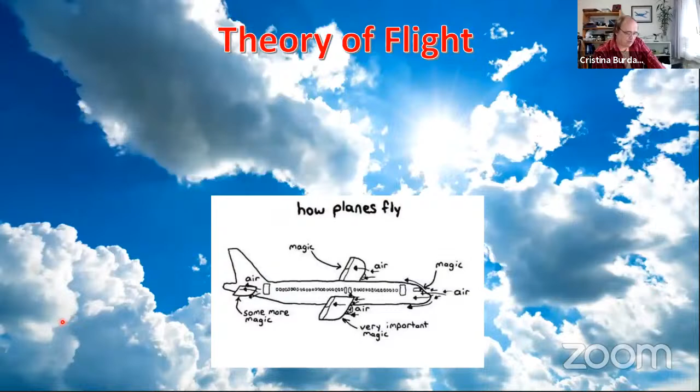Good evening, and thank you, Simon. Tonight I want to talk about some theories of flight, as opposed to the singular theory of flight. I'm going to attempt to demystify some things that have been said and reported in the press - and not only in the press, but in the way I learned about aviation, which I found really annoying, but we'll get to that. Who am I? I work at Pilatus Aircraft Limited. I look after aircraft performance, from design, development, and certification to operational support. But I'm obviously just one of many, many engineers.

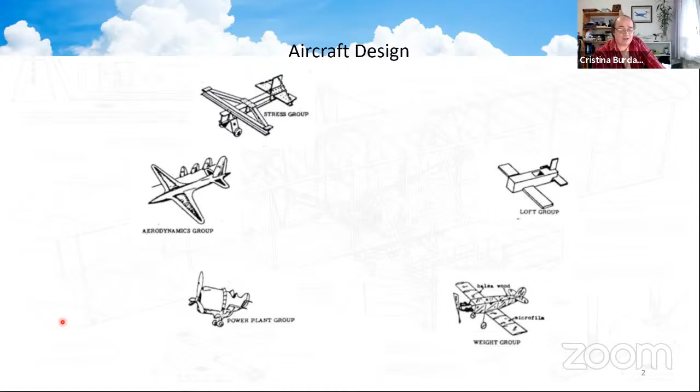In aerodynamics, we love our airplane to be sleek, smooth, rounded, so when it's offered to the air, the air gets out of the way and lets the airplane through. But when we give our drawings to the loft group, they look at what they can draw and produce, and invariably it looks a little different. When the stress group gets involved to make the aircraft nice and strong, they prefer something with iron girders, and you can imagine how this builds up. If they have iron girders, it's all heavy, so we need the weight group in there to make things nice and light again. So we keep fighting with various groups - it's a cooperation, a very difficult birth. And the power plant group, they only think about one thing. So airplane design is a compromise.

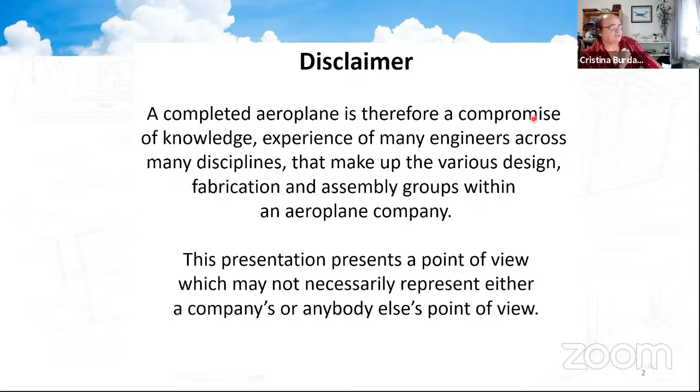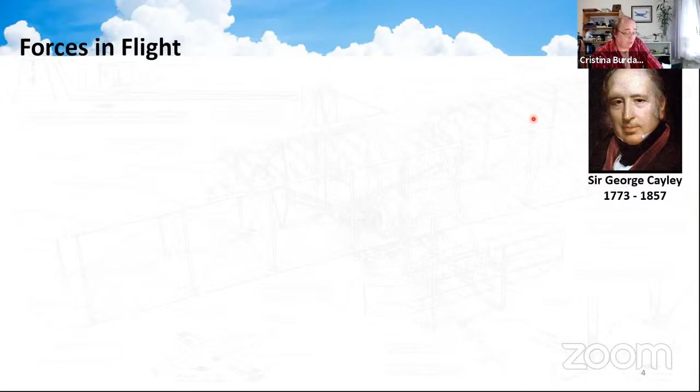So we're going to talk a bit about the science side. Where I'm going to start is on the subject of lift, but I'm going to touch on the historical part by starting on a grassy knoll in Yorkshire, where the landowner, one George Cayley, had been studying aviation for decades. He'd studied many aspects of aviation, loved watching birds and how things flew. And when he was about 80 years old, he came out with a design - this governable parachute.

This is circa 1853, in Scarborough, Yorkshire. He was a bit old to get into this thing himself, and so he volunteered his coachman, one John Appleby.

The reason he did that, at least the story I've heard, is that this glider was going to be pulled by a horse because he wanted to demonstrate the forces of flight. And it actually flew. It flew 900 feet. It crashed.

Mr. Appleby was given basically what looks like a boat with spoke wheels, and it looks like a tiller. This was actually meant to supply control so he could try and make this vehicle pitch up, pitch down, go left or go right. But I can imagine it offered him no control whatsoever.

It crashed after 900 feet, but John Appleby, the coachman, survived. By the time George Cayley managed to get over to speak to him, he had a great big grin on his face that this machine actually flew. The story is that John Appleby asked to be relieved of his services because he was actually hired as a coachman, not to fly.

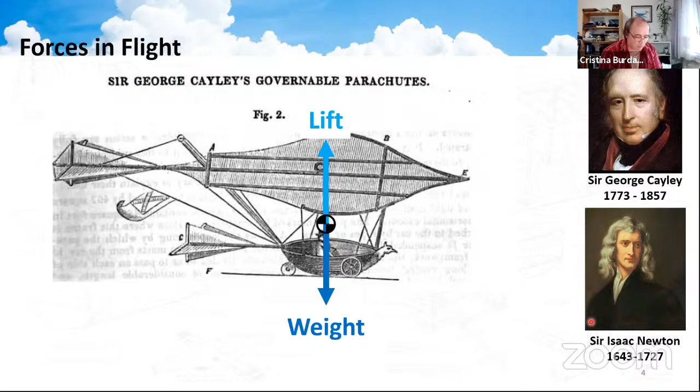He was going to do this by using a galloping horse to drag this thing forward and give it some thrust. But again, applying Newton, there must be a force equal and opposite to that, which he called drag, which would prevent the aircraft from flying faster and faster or slower and slower. It would fly at the same speed.

And these are the forces that we use. This model is basically the core of my work, to tell you the honest truth.

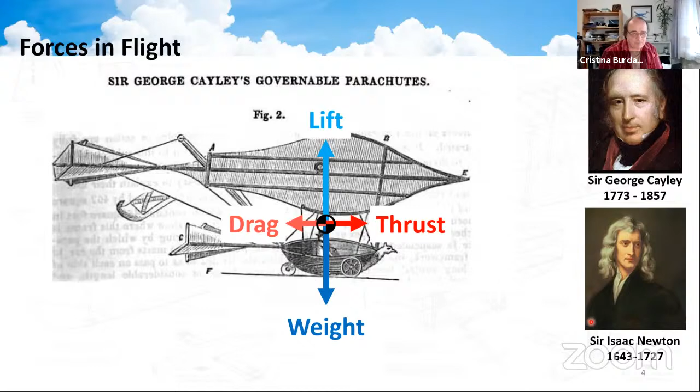Now, you might think this is a flight of fantasy, but now you guys are getting out of lockdown, try going up to the Yorkshire Air Museum, because there is a mock-up of this. It's not the original, because the original finished up in pieces, and they do fetch it out on a nice, fine day.

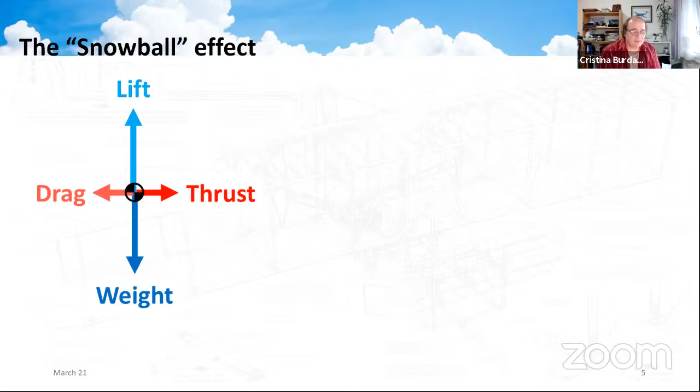So moving on, I want to take these forces and look what happens. If the vehicle took a second person on board, increasing the weight, then the lift must increase as well for the vehicle to stay straight and level.

But the thing you don't see is there is a connection between the lift and the drag. As lift increases, the drag must increase - that's the way it works. But if drag increases, you're going to have to increase the thrust. Now on an airplane, that means either opening the taps, putting in more fuel, or putting in a bigger engine, or both.

But all that means is you would actually increase the weight. And of course, that brings us back to the beginning. So it's a very difficult, a very tender relationship. It's a love-hate thing that goes on. But fortunately, this process is reversible.

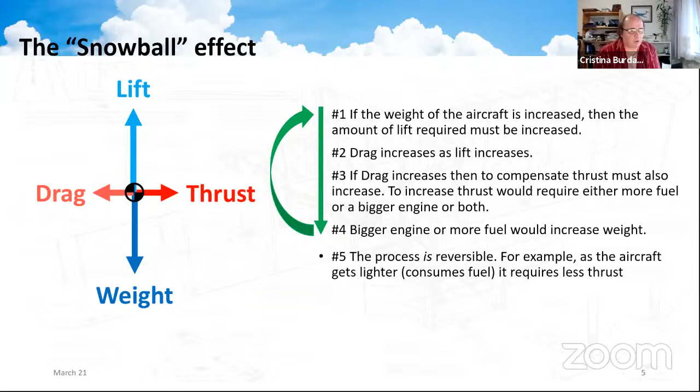As your vehicle gets lighter, as you consume fuel, the aircraft will go faster. In fact, you probably have to finish up pulling back the throttle in some cases. Now, that's all okay. That's what lift is. But where does it come from?

There are a number of theories when I was studying about where lift came from. One theory is the longer path or equal transit time theory. Air is offered to the aerofoil, and the air particles - the blue line goes above, the red line goes below - but they meet together at the end of the aerofoil. They separate at the start, but meet again at the end.

Now, when I was being taught this, I was thinking, well, how are the molecules connected? Is there a rubber band or something? Anyhow, this is a theory we were taught, and because you've got to go a further distance on the upper surface, you'll go with a higher velocity.

There was actually a Swiss guy, Daniel Bernoulli - and in fact the Bernoulli family are very interesting - who realized and worked out that the higher the velocity, the lower the pressure. So on the upper surface, you had a higher velocity, lower pressure. On the lower surface, you had a lower velocity and a higher pressure, and the difference between the pressures provided the lift.

It is incorrect. Now, why am I telling you this? Because I was forced to learn this at university as if it was gospel, and as you can see, this is incorrect theory number 1. There are several incorrect theories, and I learned them all. I have exam papers on them, and I don't know why I had to learn this.

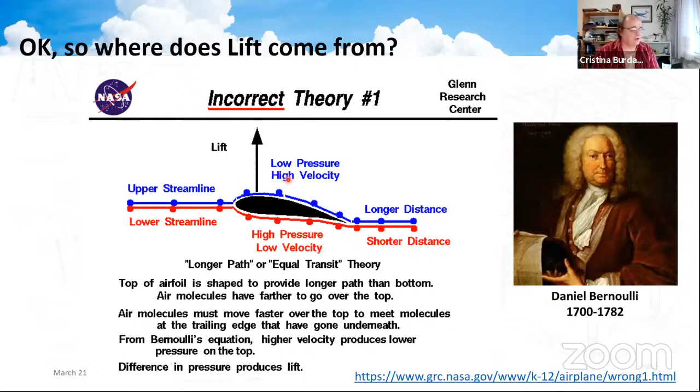Let's show you how this is wrong. I'm going to be handing over to Professor Holger Babinsky at Cambridge Uni, who explains this very well.

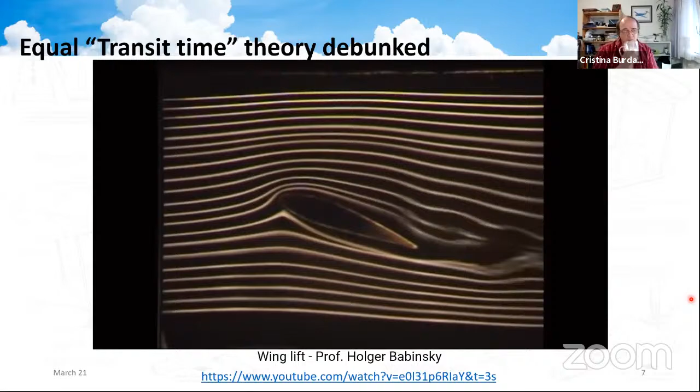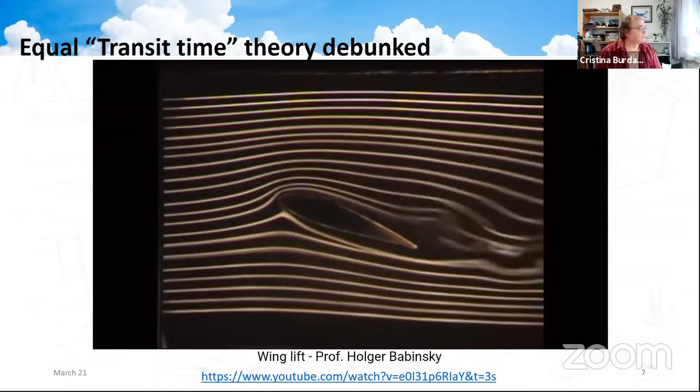Lines. It's often said that lift on a wing is generated because the flow moving over the top surface has a longer distance to travel and therefore needs to go faster. This common explanation is actually wrong. This video shows that the air on the top does move faster, but it doesn't reach the end of the wing at the same time as the air along the bottom. Here we use smoke to visualize the streamlines around an airfoil. We can pulse the smoke by briefly interrupting the supply. This gives us lines that travel through the flow, as we can see here. And if we now slow the video down, you can follow those lines, and that gives you an idea of how fast the flow is in different parts of the airflow. Here you can see it speed up as it approaches the airfoil, and it moves faster over the top compared to the bottom. You can see that it reaches the end on the upper surface much earlier than it does on the lower surface. In fact, by the time it reaches the end on the lower surface, the flow's already gone a long way past on the upper surface. This shows very clearly that the flow doesn't take the same amount of time to reach the end of the wing.

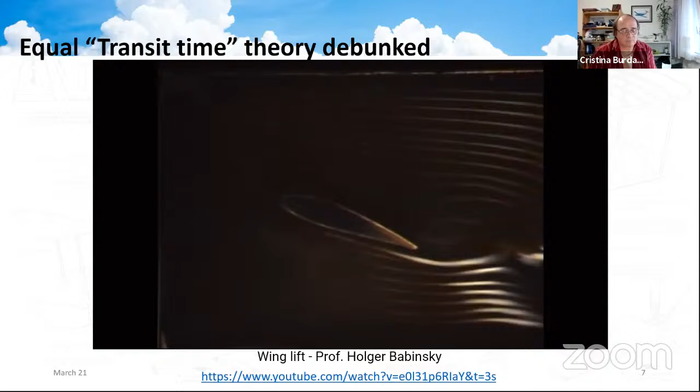Okay, so in fact, it's even faster. That disproved the theory that I was showing you before. As I said before, these were theories I had to learn, instead of learning how lift is really generated. I'm going to attempt to explain to you guys tonight in about 3 minutes how lift is generated. And if I fail, trust me, Prof. Babinsky has got more videos - it'll take about 20 minutes to explain it, but it is worth listening to.

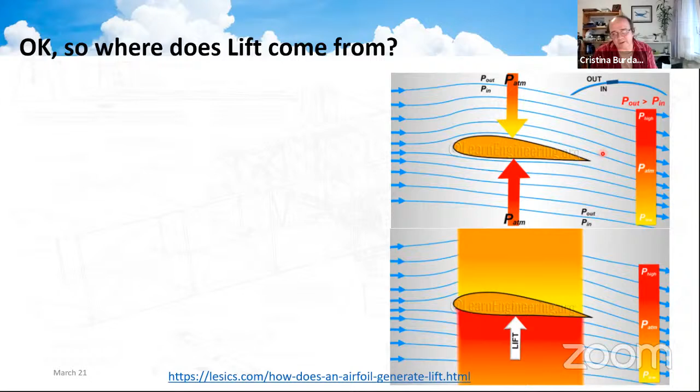If you recall, the flow around the airfoil forms curves. Imagine these lines as smoke particles that cause the flow to bend around the airfoil in a downwards fashion. Now, if we look at this a little closer, that means as the particle of smoke is going along the arc, the pressure on the outer part of the arc must be greater than the inner part of the arc. So the pressure on the outside is greater than the pressure on the inside.

If it was the same, the particle would continue in a straight line, according to Newton. And if the pressure on the inside was greater, the particle would actually deflect upwards. So we know that the pressure on the outside of that arc must be greater than the pressure on the inside.

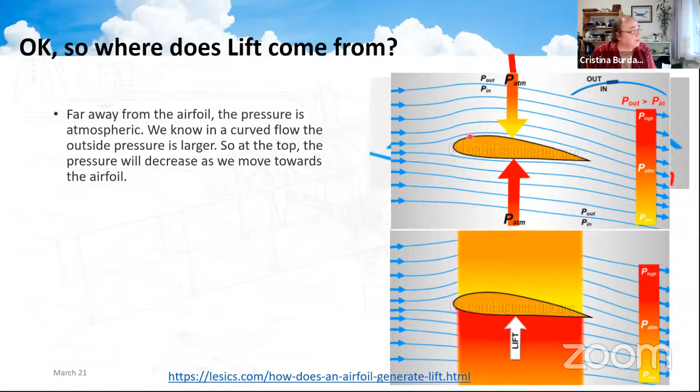If we're far enough away from the airfoil at the top that we're at ambient pressure, each time we come in we're reducing pressure. This pressure is greater than this one, is greater than this one, and so on. So on the upper surface of the wing, we actually have a lower pressure than atmospheric, and the opposite argument can be made for the lower side. You get a higher pressure than ambient on the lower side. And so the lift is simply the difference between the pressures between the upper and the lower surfaces.

So the incorrect theory you saw before has the right explanation, but it achieved it the wrong way. You only get lift if the flow bends. If the flow doesn't bend, the only thing you're getting is drag. And the flow will bend based on the speed of the flow and the shape of the objects in the flow. That, in a nutshell, is where lift comes from.

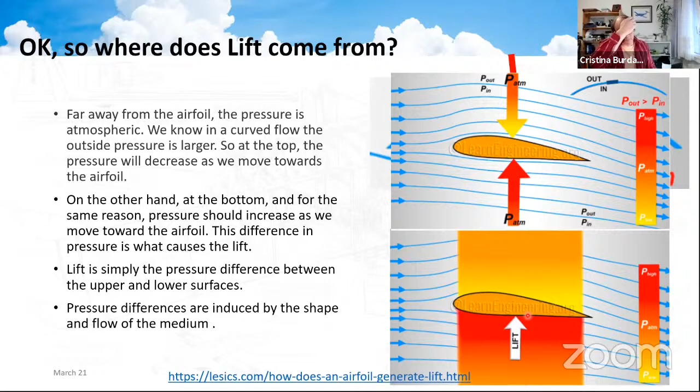Okay, so I think I've given you enough on the physics side with regards to lift and the importance of weight. What I want to do now is bring you bang up to date and start talking about emissions, because this is a very topical subject at the moment, and people are making some extraordinary claims, and we're going to be examining some of those claims.

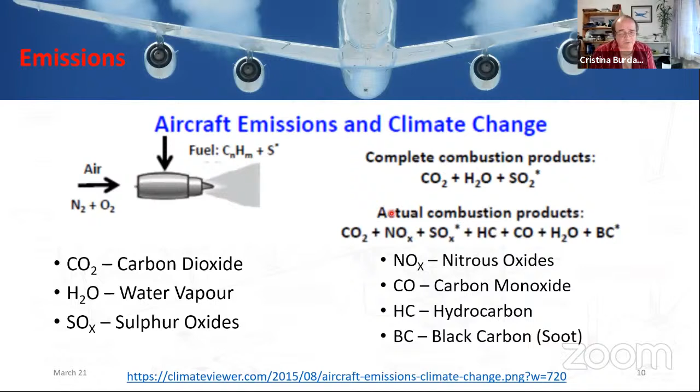So what are emissions? If you imagine jet fuel as a hydrocarbon, basically carbon and hydrogen atoms joined up in the molecule. From fossil fuel, we get a lot of impurities, and one of the main ones is sulfur. In the other end of the engine, we throw in nitrogen and oxygen, basically air. So out the back, you're expecting to see a combustion process which produces carbon dioxide, water, and sulfur dioxide from the impurities. But in fact, what we get are several other things: oxides of nitrogen, oxides of sulfur, unburnt fuel which is hydrocarbon, carbon monoxide, and in some cases black carbon, which is soot, just carbon.

Now, what's extraordinary, I find, looking at this figure on the right-hand side, is for every 1 ton of kerosene we throw in, we produce 3.15 tons of carbon dioxide and 1.24 tons of water. The other emissions that come out the back of the engine are relatively small, but we put in 1 ton of kerosene, burn it, and we're getting more than 4 tons coming out the back of the engine. You can't create matter, can you?

Well, let's examine this a little more carefully, but this means I'm going to push you a bit on organic chemistry, and you might have some nightmares about that. So kerosene has no simple molecular description. It's made from hundreds of different hydrocarbons - paraffins, olefins, aromatics. There's no simple formula. And on top of that, in the aviation world, we throw in things like icing inhibitors because we can't afford the fuel to ice up, corrosion inhibitors because we don't want it chewing our tanks, and biocides because we don't want algae growing in there. So it gets very difficult to examine from a pure chemistry point.

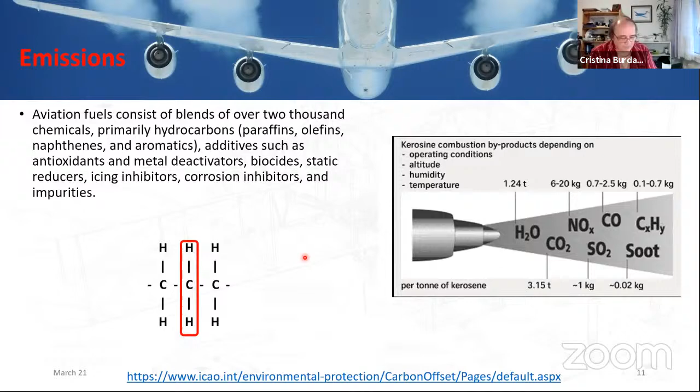But what I'm going to do is simplify the problem. Let's look at it as a hydrocarbon, just looking at a segment of a hydrocarbon molecule. So we have a chain of carbon atoms linked with each other, and hydrogen atoms attached to those carbons. Fuel, of course, has benzene rings and other things in there as well. But I'm going to simplify the problem even further - I'm going to just take one segment, plonk that segment over there, and we're going to start looking at some molecular weights.

So if I look at the hydrocarbon here, CH2, and add up the atomic weights, I'll finish up with 14 units. If I now replace those hydrogen atoms with oxygen atoms, I'll finish up with 44 atomic mass units. If I divide 44 by 14, I get 3.14, which is very close to the 3.15 value over here. I do the same with water, because the hydrogen detaches, oxygen attaches, and now the hydrogen will attach to oxygen, forming water. I get a similar value again - 1.28 compared to 1.24.

Now, anyone who does carbon offsetting will see a figure of 3.16 in the aviation world, maybe 3.15 elsewhere. You multiply this figure by the weight of fuel you are consuming, and that tells you the amount of carbon you need to offset. So if anyone looks into carbon offsetting and sees this number, it is not a made-up number, it has some chemistry behind it. I have oversimplified the thing tonight, but it gives you that it's broadly a correct number.

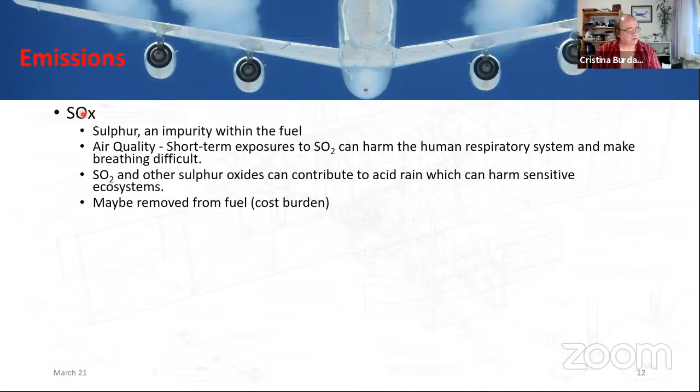Nitrous oxides. Well, where does the nitrous oxide come from? Nitrogen is normally quite an inert gas, but it's formed by combustion. Once you heat or set fire to something, nitrogen gets rather excited and will want to bond, and it's formed by this combustion process.

And nitrous oxides have huge influence on our ozone layer. So in the upper atmosphere, towards the stratosphere and so on, ozone, you may remember, well, we want ozone layers because it does things like block ultraviolet radiation. You may remember from the past, we had the problem with aerosols eating into our ozone layer. But we don't want ozone at the lower layers.

In the lower layers, together with interaction with other chemicals, it forms smog. And again, we're back to air quality and being able to breathe. I remember being in London thinking this was pretty bad because out where I am at the moment, I'm not in a huge city where we get lots of nitrous oxide produced.

The thing about nitrous oxide is it also gets formed naturally, and it gets formed, as I say, in combustion. So it also gets formed in things like lightning flashes. And maybe Simon, our weather chap, can talk about this a little bit later. But as far as I can tell, there's more than 1 billion lightning flashes across the planet in any given year. In fact, you can see a lot of activity in various places. So a lot of nitrous oxide gets formed in the atmosphere naturally, but we are concerned about nitrous oxide as an output. It's one of the things we're heavily trying to avoid putting out in the aviation industry.

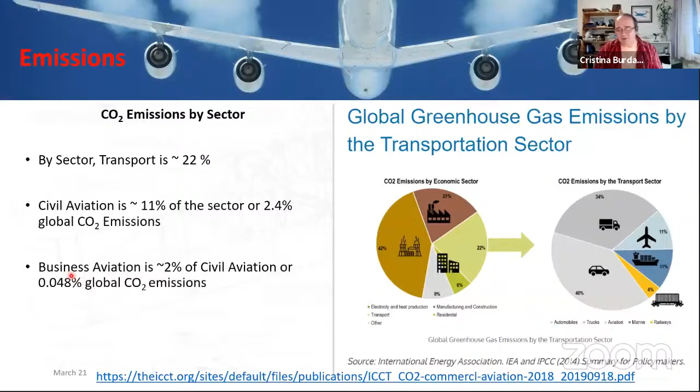When I look at numbers, I like to have some sort of feeling, some sort of sense of those numbers. And when they're so big, you normally lose all sense of feel for the numbers. COVID has actually hit the numbers quite hard, but I'm not worried about what COVID has done at this point. I want to focus on the 100 billion gallons.

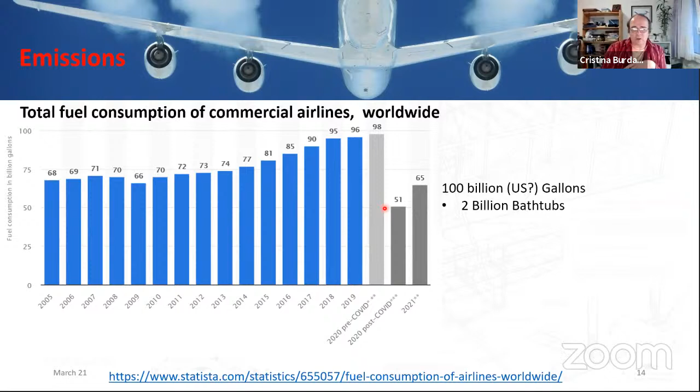What does 100 billion US gallons look like? Well, that's 2 billion bathtubs, but I still struggle with that, that's too big a number for me. What else could that look like? Over 151,000 Olympic-sized swimming pools. Hounsdale doesn't have an Olympic-sized swimming pool. What else does that look like? Chasewater reservoirs, 86 Chasewater reservoirs going up every year, or six and a bit Lake Vyrnwys.

Now, if you accept what I was saying before, that aviation is 2.4% of global CO2, then what we're putting in the planet is 3,585 Chasewater reservoirs worth of fuel, or 264 Lake Vyrnwys. So when people argue to me, oh, how arrogant is man that they think they can influence the climate, I struggle because I don't see how we can't be affecting the climate. And remember, this is 1 year's worth of carbon dioxide we're pumping out. We've been filling the planet since the Industrial Revolution, 250 years ago. We've been filling the planet ever since that period. And yeah, it's huge. So what are we going to be doing about it?

I want to introduce you to an organization called ICAO, the International Civil Aviation Organization. They are the United Nations of the aviation world. They set out global policies, global mandates, and each local authority, like in the UK you have the Civil Aviation Authority, in Switzerland we have the Bundesamt für Zivilluftfahrt, or BAZL. Each body can define higher standards than what is defined at international level, should they so desire.

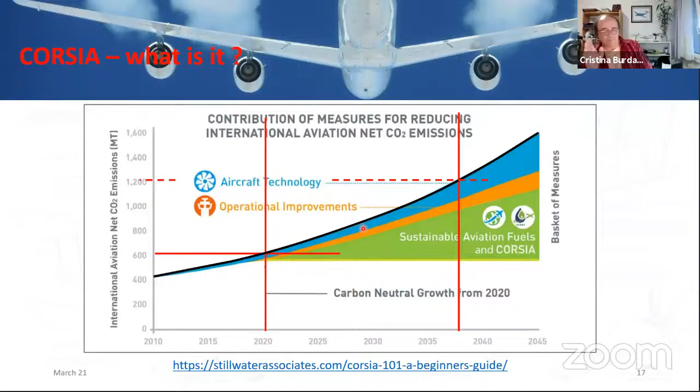Now, you saw earlier how we saw a climb in the consumption of fuel. So if we look at the net CO2 emissions in megatons over the forecast period over the next 25 years, if we plant ourselves at a point in 2020, this black line represents the projection of air transport, and we were reckoning a doubling of the transport within the next 15 to 20 years. Now this is all pre-COVID, so I'll talk about that a little later, but we're working to these numbers. COVID has maybe shifted this graph to the right a bit, but we're still working to these numbers, and we're going to be trying to resolve this issue.

How are we going to resolve this issue? Well, what the aviation sector said was they want to do carbon neutral growth. How are they going to achieve carbon neutral growth? They're going to use a set of basket of measures. In that basket of measures, we've got aircraft technology. We're going to be trying to make the aircraft lighter. You saw the importance of weight earlier. We're going to be trying and improving engines. As you saw, we have unburnt fuel that's managing to get through the system. We're going to try and improve how the fuel is consumed. We're going to try and make the aircraft cleaner.

Aircraft technology, we're hitting this every time. We're always trying to improve, but now we have more emphasis. If you go back to the disclaimer I had at the beginning, where we have this set theory, we could put all the engineering teams in. On the right we had the loft group, production group. If you want to make your airplane cheaper, you push the scale that way. But if you want to make your aircraft more efficient, you push it back the other way towards me, aerodynamics. That's one part of our basket of measures.

Operational improvements: there used to be a time where you'd be in the airplane waiting to take off, and when you arrived at your destination you could be put in a hold. That doesn't happen anymore. When you go to take off, there's only 2 or 3 airplanes in front of you, not 10 or 20 like before. You can only take off if you've got clearance to land, so you don't hold at destinations anymore, so we burn much less fuel. When you're taxiing on the apron, you don't taxi on 2 engines, you taxi on 1. So operational improvements bring us some way down as well.

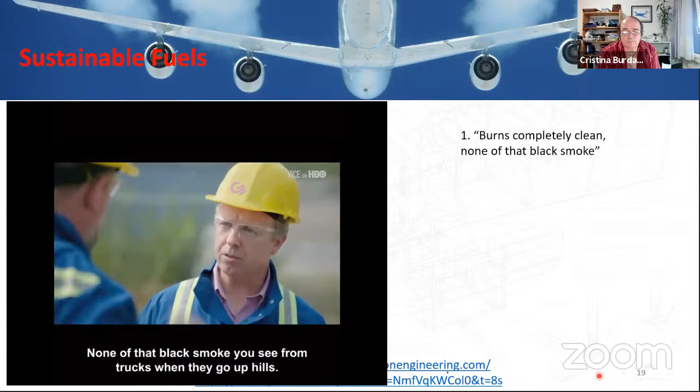Why don't we recycle energy? You're hitting the nail on the head. We would like people to be recycling their fuel in the same way as they recycle other things. Your technology is we're going to pull that carbon out of the atmosphere, combine it with hydrogen from water, and that's the same as gas or jet fuel? Yeah, it's chemically the same. No pollutants — our diesel burns completely clean, none of that black smoke you see from trucks when they go up hills. Completely clean, but yeah, chemically identical.

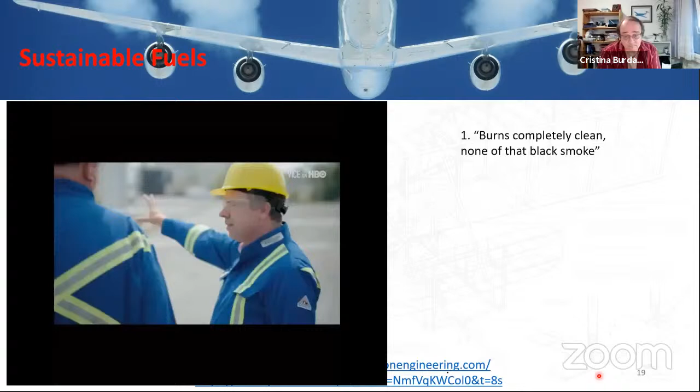So this is our plant. Great to have you here. Everything here is a working model, full process working, and we are capturing CO2 from the atmosphere right here. Think of it like a big cooling tower — a large fan draws the CO2 in, there's a chemical reaction, and we capture the CO2.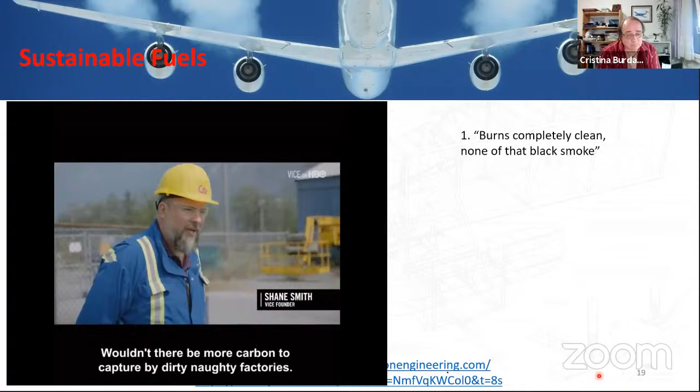Wouldn't there be more carbon to capture by dirty, naughty factories? No, it's uniformly distributed. We could put one of these plants in the middle of Beijing, or in the middle of the Sahara Desert, and you'd capture the same amount of atmospheric CO2. So we as a species have put it in, so we as a species should be taking it out. Well, that's our choice, but I think we have to, or find somewhere else to live.

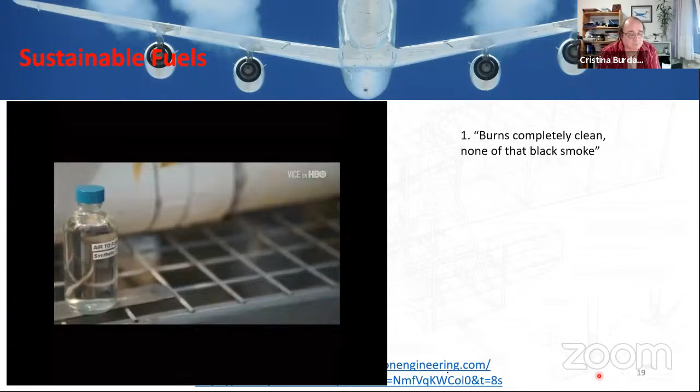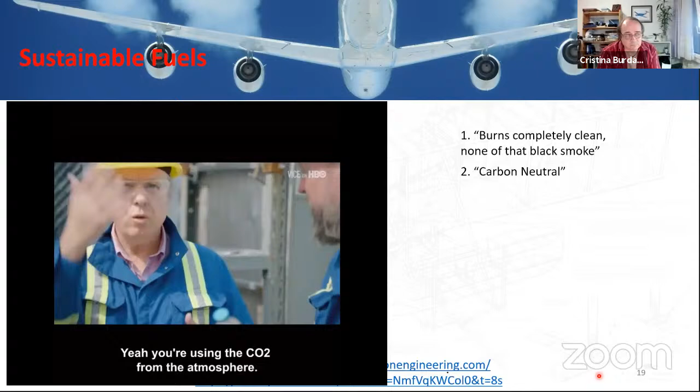This is the fuel that we make. It looks exactly the same as any other fuel. It's very, very high chemical performance — higher performance than the stuff you buy at the pumps today. So it's better than the pumps, it's carbon neutral, and theoretically cheap to make because you're refining the energy that's already out there in the atmosphere. Yeah, you're using the CO2 from the atmosphere. The only feedstock, the only thing you're consuming, is renewable electricity.

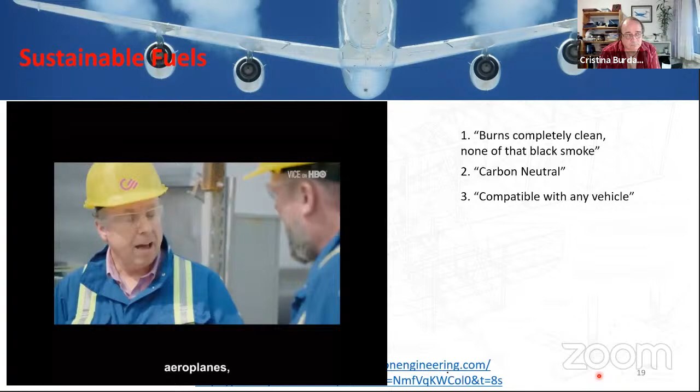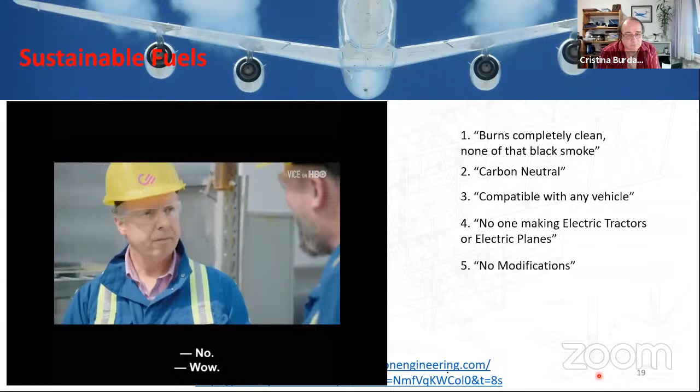But here's the interesting thing: a carbon neutral fuel that's compatible with any vehicle in the world today. So that car you just drove up in, we can make that carbon neutral tomorrow. Wow. Any vehicle, any performance vehicle, any battered old truck, aeroplanes — we're compatible with all of those. Which is significant because nobody's making electric tractors or electric planes. Do you have to do any modifications? No.

So transportation is about 20% of CO2 emissions. How are we going to decarbonize that? There's 1 billion cars in the world. So if we all go electric, at $50,000 for an electric car, that's $50 trillion. Then you've got to deliver energy and electricity to each car. It's a massive change. Yeah.

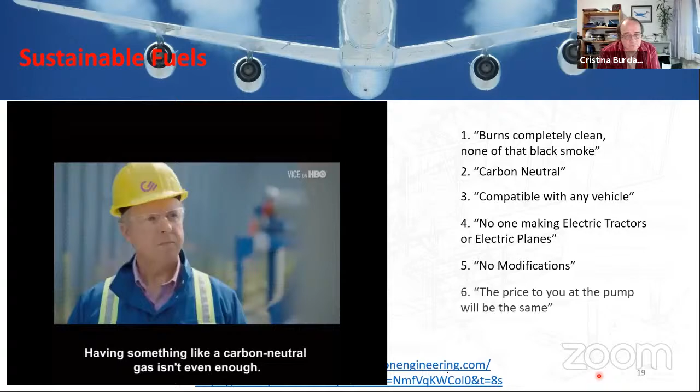Alternatively, why don't we just change the fuel? The price to you at the pump will be the same. Having something like a carbon neutral gas isn't even enough. We've got to start going negative. We've got to actually pull carbon out of the atmosphere.

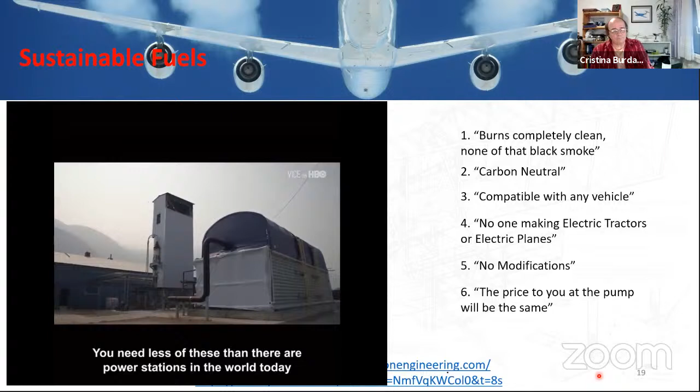Now, can this do that? And what's the plan? You can take the CO2 generated here and bury that underground, and you get to negative emissions. It's a hugely important thing. And how many do you need to scale it to get to carbon negative? You need less of these than there are power stations in the world today to net emissions out to zero.

And how many is that? It's in the region of tens of thousands. If we are taking measures as we should be to remove emissions elsewhere, now you start getting to an overall negative emissions from the world.

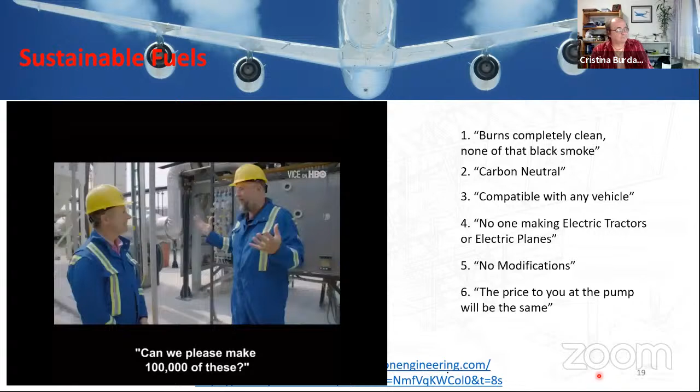Why isn't the world rushing to Squamish, BC and saying, can we please make 100,000 of these? So first of all, we're open and ready to receive the world. Secondly, we've really just got a proof of concept here, and it's working. So the next step for our business is to expand across the globe, make carbon neutral fuel, and when the scientists and the governments decide that they need to do negative emissions, the technology is ready.

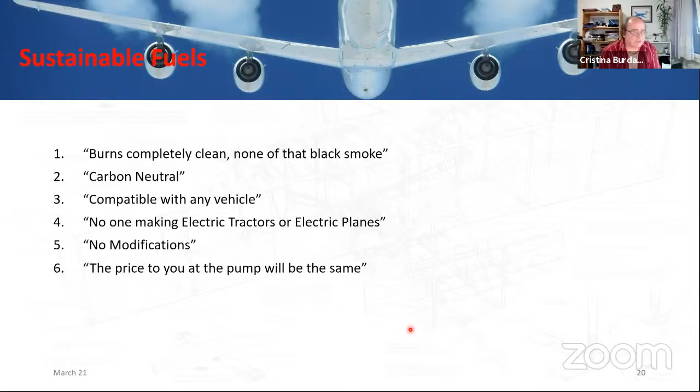Okay, so that all sounds really quite exciting. And I picked up on a few things I'd like to discuss. So let's go through some of these things.

Burns completely clean - well, if I remember right, normally if a truck's burning black smoke, it's usually that the fuel is not burned properly, or it's injector performance. This fuel will not solve fuel injector issues. It will burn differently, so it may not be as black, and it hasn't got in this fuel the impurities we have in fossil fuel.

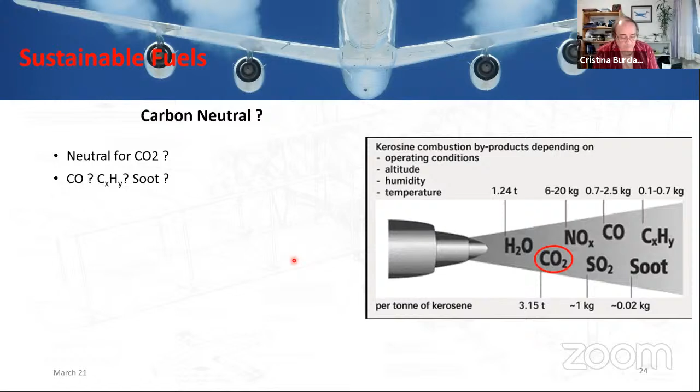Carbon neutral - well, neutral for carbon dioxide, yes. But if you remember, we had other carbon sources: carbon monoxide, unburned fuel, and soot. So he's neutral for CO2, and CO2 is the biggest contributor. The other ones are less so, considerably less so. But again, if he wants to claim carbon neutral, I'm a little hazy, because there's bits and pieces of other carbon which aren't being taken out.

Compatible with any vehicle, as long as it meets the fuel standards of that vehicle - absolutely. And here, I'm in full agreement with what he's doing.

No one makes electric tractors or electric planes. Well, that's an interesting one. Electric tractors, you can buy them today - you don't even need to sit in them. I don't know when these tractors were available, and I don't know when Steve made his claim, but there are, well, not plenty, but there are electric tractors out there doing some fantastic stuff.

Electric planes, that's an interesting one. So let's have a look at electric planes. I'll get to the chart in a moment, but let's have a look at what we've got. This is from Zunum. They had investment money from Boeing, but Boeing have run into trouble and pulled the plug. Zunum at the moment - I don't know where they're going, what they're doing - and so that project at the moment is on pause.

This project over here, Alice, is an Israeli product. They had an unfortunate incident with their first prototype - no one was hurt - and the second prototype, I believe, is either about to fly or is flying. They're pushing ahead, it's looking interesting, but as an aerodynamicist, I do worry about the position of some of their engines. The really interesting one, though, is the airplane at the bottom.

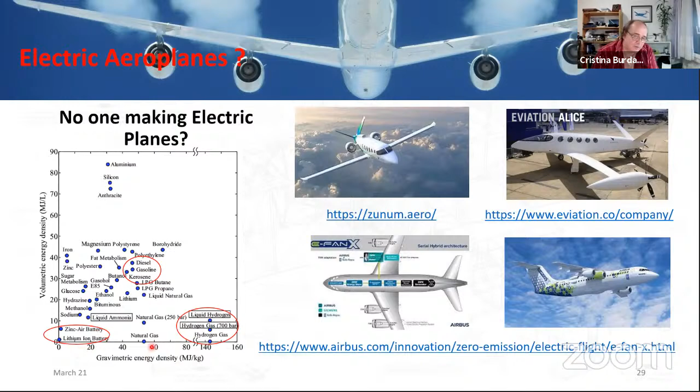So you may have seen some developments in the industry where they're talking about urban air mobility, and it looks like nothing more than a collection of quadcopters. Now these quadcopters are all going to be electrically driven - it's air taxi and all this. It sounds wonderful, but frankly, the ones I'm seeing here, apart from the one flying, the others are just working with helicopter blades. They're not taking advantage of lift. Lift is important, it's doing work for you - put a wing on the design.

So this is where this one scores - that's Lilium up there, which is being done up in Munich, and this one is Joby, which is in the US. And the thing is, there's quite a proliferation of these - there's actually more than 10, so it's probably approaching about 100 different designs of urban air mobility. And they're all working with electricity.

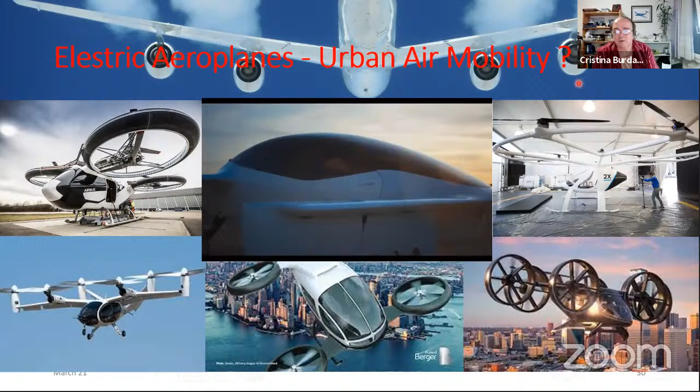But when you get to your destination, what are you going to do? Wait the next day to charge the batteries? Swap the batteries out? It doesn't, to me, make sense as a business case. The air vehicle needs to be out there working as much as possible to earn its keep. So when it comes to electric aeroplanes, I have to agree 100% with the claim that Steve made. No one's making it work - they're trying, but it's not working.

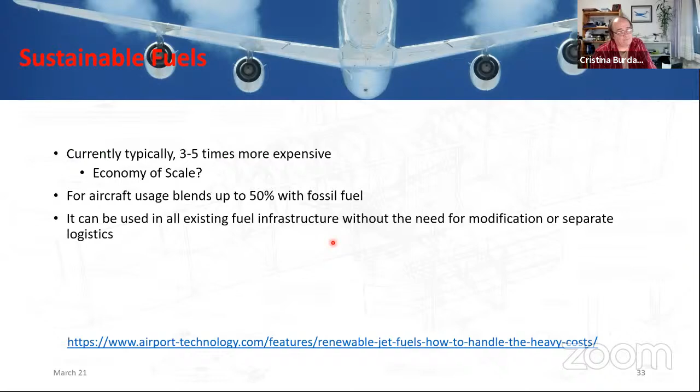Electric tractors, no, they're there - no modifications to your vehicle, absolutely. And this is like the Holy Grail: it's a drop-in, you may hear the term drop-in solution, and then the price at the pump to be the same. Well, this isn't Steve's direct air capture - this is using biostock. But currently they're 3 to 5 times more expensive, and we do blend them, which helps bring the price down a little bit. But at the moment, sustainable aviation fuel is not a big thing. It may come down with economy of scale.

There's companies such as Gulfstream who have been operating for over 3 years - they've done 550 flights, flown 1 million miles on sustainable aviation fuel. We need to prove that the fuel isn't eating the tank, isn't eating the fuel system, isn't eating the engine, that it works. So we need to get a degree of reliability measurements into this.

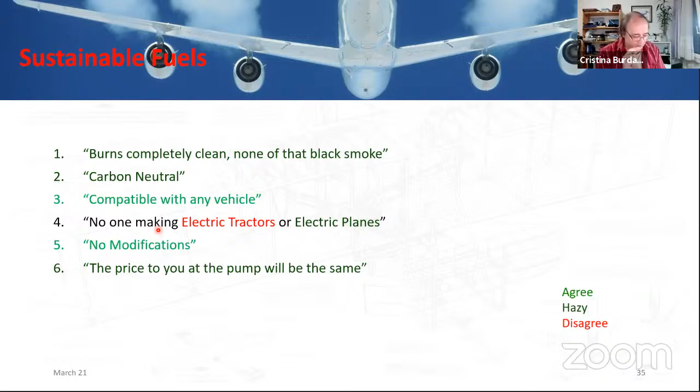So that's my take on what Steve's been talking about. The interesting thing on direct air capture, though, is he can take carbon dioxide out of the atmosphere and bury it.

Now, ICAO - the other thing after sustainable aviation fuels was CORSIA, the Carbon Offsetting and Reduction Scheme for International Aviation. It's in the pilot phase at the moment, and will probably be introduced in the next 3 to 4 years. This means carbon credits, and carbon credits can be things like green projects - whether you invest into sustainable forest management, reclaim forestry, or invest into renewable energy projects. So there will be carbon markets, and you'll be encouraged to invest in them. However, there is no managed, monitored, accredited system today.

In 2007, some chap - I don't know exactly where he was, not necessarily in Hungary - offered carbon offsetting for the Vatican, and gave them a certificate. But the forest he said he was going to reclaim, which was in Hungary, never happened. You can imagine how happy the Vatican were about that, and the Vatican weren't even paying anything - this guy was just trying to get them on board so he could advertise that he's got God on his side.

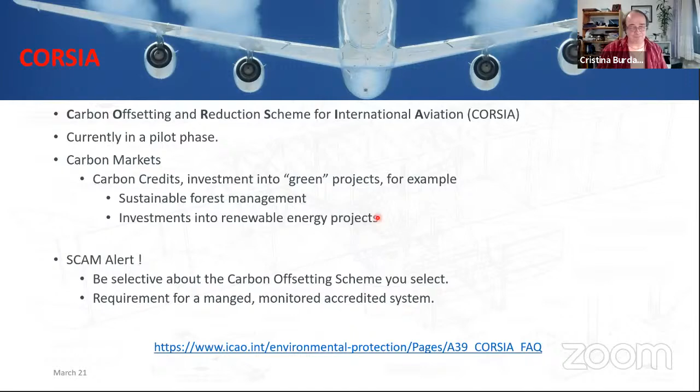Now, what alternative energy sources can we have apart from fuel? We talked about batteries. There's been demonstration flights around the planet, and here is a small aircraft that is certified and flying on batteries. In fact, it flies for about 15 minutes, including reserves.

That's fantastic, but for larger scale aircraft it doesn't work because batteries just do not have the energy we need - it's about 40 times less than jet fuel. And then what are you going to do? Normally the airplane gets turned around within the next hour or so for the return trip. You can't lose time for charging batteries, and you probably don't want to swap out the batteries.

So if we can't do batteries, if we can't store electricity on board, what about if we create electricity on board? Fuel cells. In fact, there's been a couple of fuel cell aircraft already. Boeing Phantom Works have created an aircraft which they flew a few times, and recently in Cranfield, ZeroAvia have been testing their aircraft.

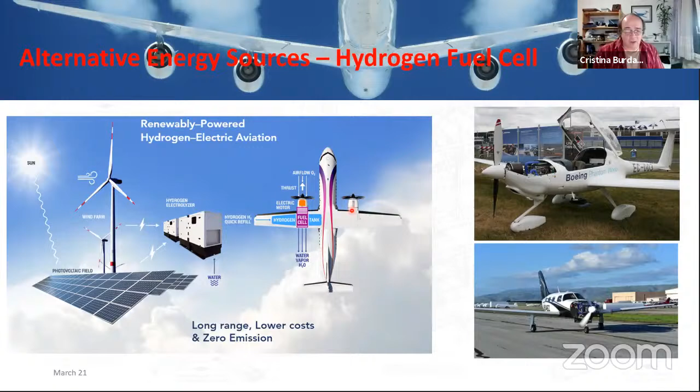Hydrogen fuel cells have been around a long time, since the 1840s. In fact, hydrogen fuel cells in the 60s have been to the moon and back. So it's not a new technology, but to get the energy out for the weight that they will be is a difficult thing. How do hydrogen fuel cells work? There's a very short presentation on that.

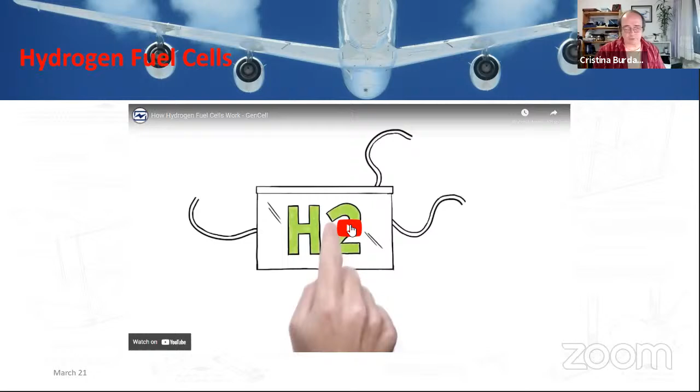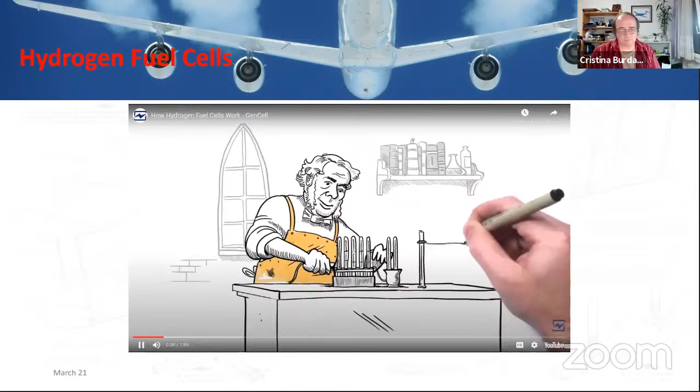Have you heard about the new sustainable energy technology called fuel cells? In fact, they're really not that new. Fuel cells were invented in 1839 by William Grove and were developed by Pratt & Whitney and other companies in the 1950s. Safe and dependable, they were used by NASA and the Russian space program to power spacecrafts. Today, leading global companies like Apple, Verizon, and Coca-Cola use fuel cells to generate clean power. Honda, Toyota, and other car companies use them to power their new generation of pollution-free cars.

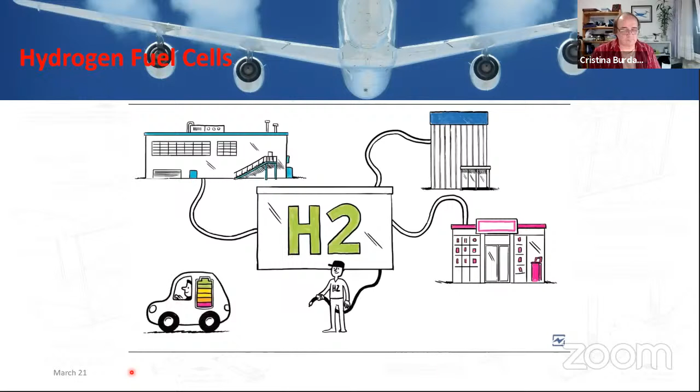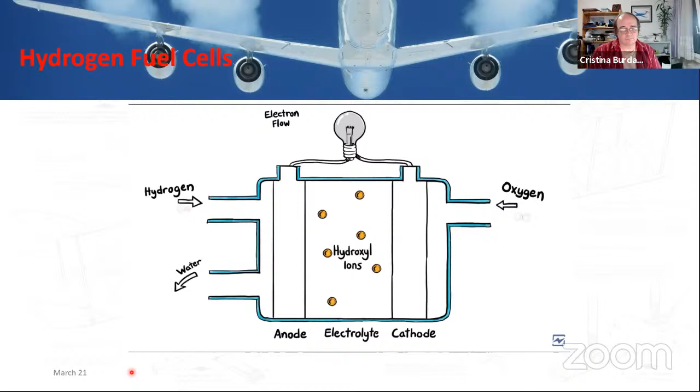So how do fuel cells work? Fuel cells use hydrogen and oxygen in a chemical process to produce electricity and heat. The only byproduct: pure, clean water. A fuel cell has two electrodes, an anode and a cathode, and between them an electrolyte. The catalyst on the electrode breaks the H2 hydrogen molecules to allow them to combine with hydroxide, OH negative ions, to create water and release electricity.

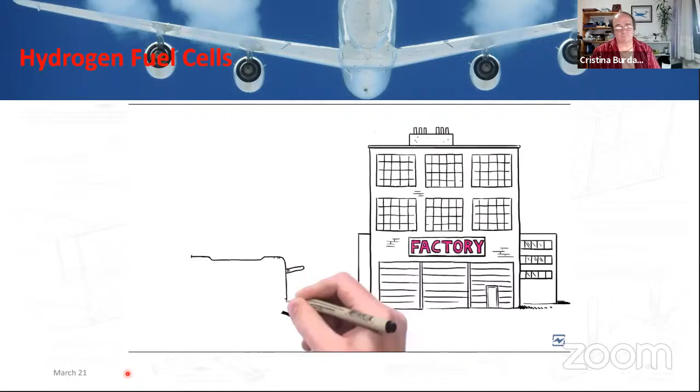But unlike batteries, fuel cells don't store power for a limited amount of time - they generate it for as long as you have hydrogen. As a source of backup power, fuel cells are much better than diesel generators. They aren't smelly or noisy, and they don't produce harmful exhaust. Fuel cells can be used anywhere you need backup power: mobile phone towers, electrical substations, manufacturing, and much, much more. Other green power solutions harness the sun or wind, but if you're caught up in a cloudy day or on days where the air stands still, these solutions can leave you without enough power when you actually need it. That's why you...

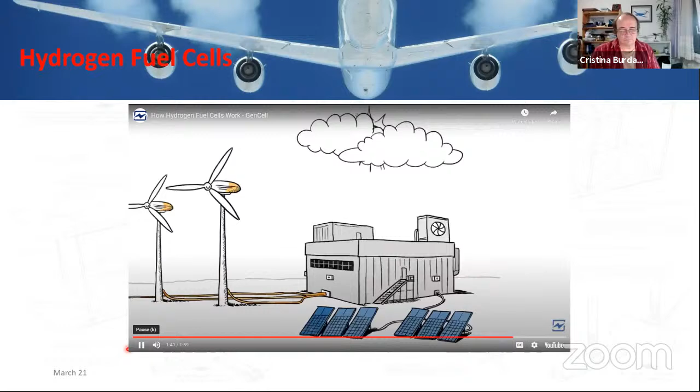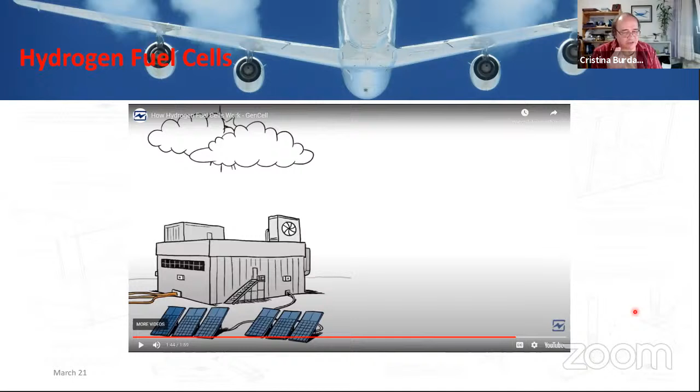I'll pause there - he's about to advertise GenCell, but I know my time's running out on me. So that explains briefly how hydrogen fuel cells work. GenCell.

And as I say, there's an aircraft that's been flying, and it's actually now starting to look at a nice sized aeroplane, a business class aircraft, with 250 kilowatts of total power, just over 300 horsepower. And this was flying down in Cranfield - or I should say, was flying down in Cranfield.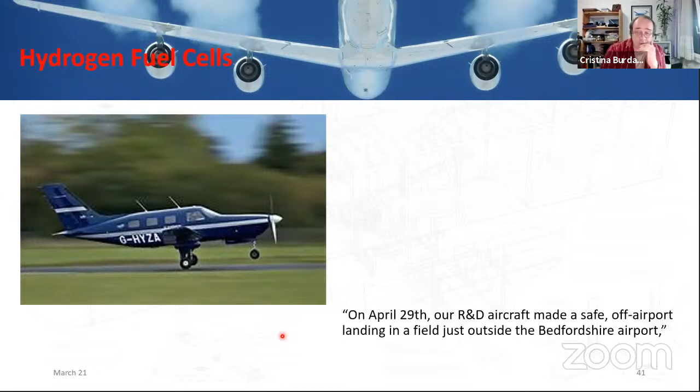Just less than a month ago, they made a statement that their aircraft made a safe off-airport landing in a field just outside of Bedfordshire airport. I'm not too sure normally what I would expect to see, but this is what a safe off-airport landing looks like.

The crew were absolutely fine. They were battered, but they walked away from this. The hydrogen was secured - you can see there's no burning or anything there. It may have been to the moon and back, but apparently it can't do a lap of Cranfield Airport.

Fortunately, I really do think this is quite possibly a good way to go. These guys aren't deterred, and they are actually going to push on with the next aeroplane, because they had a family of airplanes they're going to work along. I look forward to seeing the work from ZeroAvia on this project.

That said, I do love the understatement that's said there. I don't know if you remember, but recently SpaceX lost Starship serial number 10 on the pad. It landed, and after a few moments, it actually exploded. But of course, SpaceX won't say it exploded - they claimed it underwent a rapid, unscheduled disassembly. And they do mean rapid. I love my business because we actually do enjoy understatements.

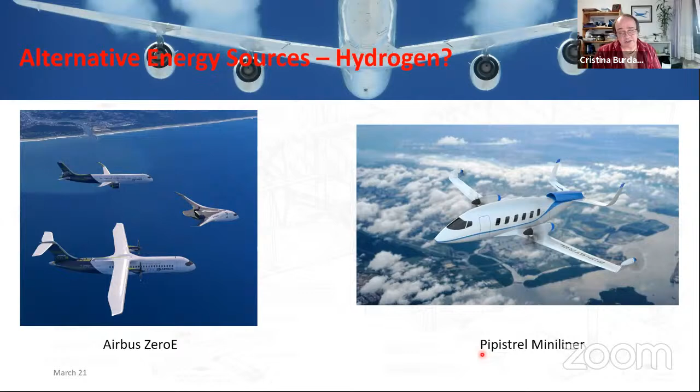So, okay, what about hydrogen itself? Well, this is why Airbus have actually abandoned their E-Fan X program, the electric airplane we were looking at. And Pipistrel, who made that other airplane I showed you earlier, which is already certified, a battery-powered airplane, are looking to get into this market.

The Russians actually looked at it in a couple of aircraft, a passenger aircraft, but that was back in the 70s, I think. I must admit, I don't remember exactly what happened there and why they abandoned it.

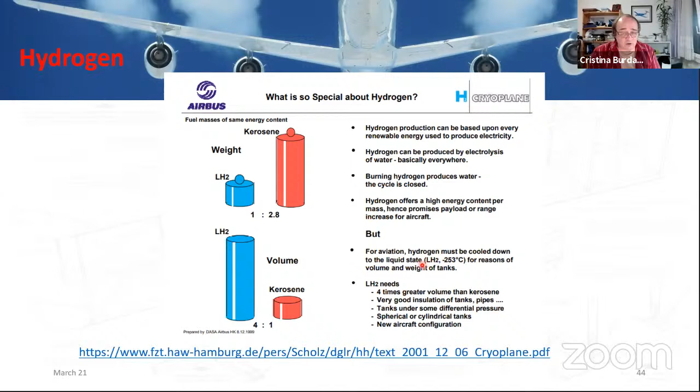What's so special about hydrogen? I've pinched this from an Airbus presentation from 1999, and we're looking at liquid hydrogen. For the same energy content, for the same energy by weight, I need 3 times less liquid hydrogen, but by volume, I need 4 times more liquid hydrogen than jet fuel. And I need to find somewhere to put it on the airplane. We're talking liquid hydrogen, so I've got to put it at minus 253 degrees centigrade.

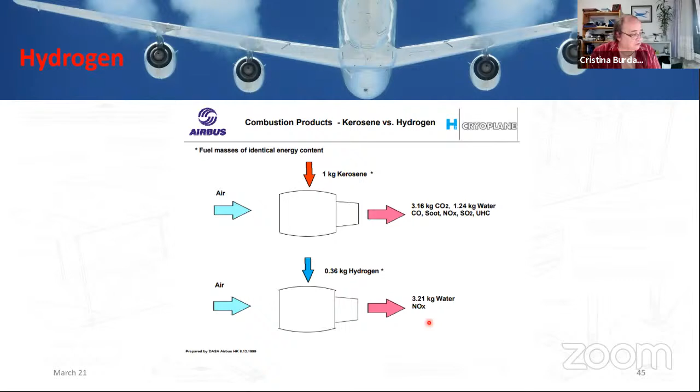Bit of a challenge. Again, let's see what happens with an identical energy content. Burning 1 kilo of kerosene, you remember these numbers from before: 1.2 and a bit kilos of water, 3 and a bit kilos of carbon dioxide. For the same energy, you only need 0.36 kilos of hydrogen. There's no carbon dioxide output, no soot output, but we're producing 2.5 times more water, and because hydrogen burns hotter than kerosene, we're going to be producing more nitrogen oxides. That is a concern in this business.

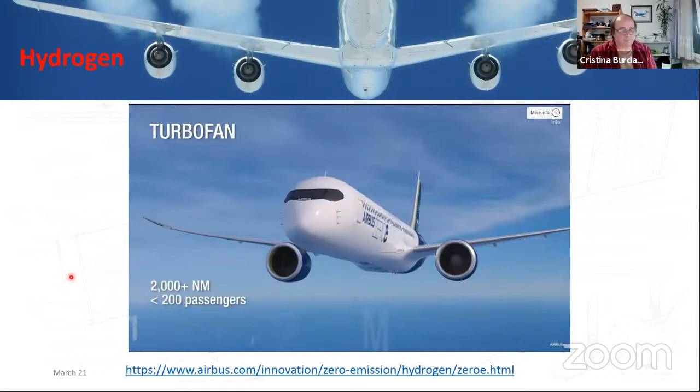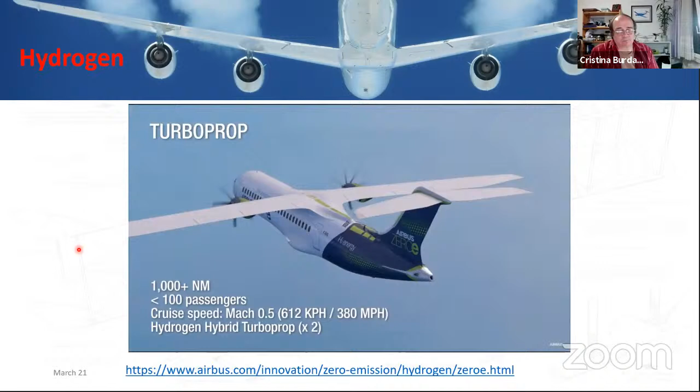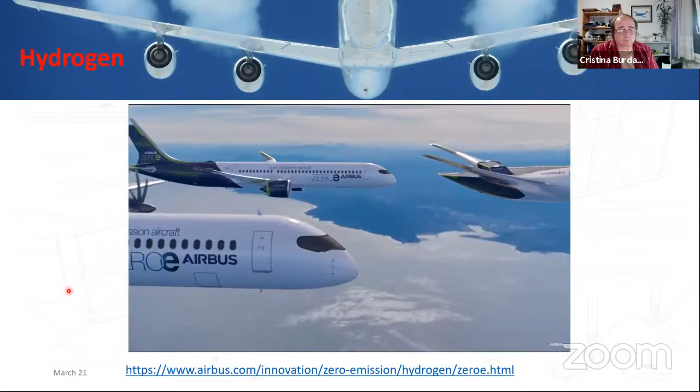Let's have a look at what Airbus think today. Airbus are now saying we can do hydrogen, or we pursue hydrogen aircraft. It's a hydrogen hybrid - what that means exactly, I don't know. They're going to be mixing the hydrogen with another alternative source, maybe hydrogen fuel cell and so on. But in that presentation, they talked about ranges of 1,000 plus and 2,000 plus nautical miles.

So hydrogen is not going to get us as far as we need to get. So, Simon, I'm getting there. Summary. Just remember, please, these are my opinions that I'm sharing with you.

Sustainable aviation, we're looking at recycling carbon, whether it's bio-waste. One thing I think will be really interesting is algae or direct air capture, which Steve Oldham was talking about there from Carbon Engineering. What I do worry about is how big the plant has to be to produce the quantities of fuel required by the aircraft.

There are desires that we move from a 50-50 split on blends to 100% sustainable aviation fuel, and we don't use fossil fuel anymore, but it requires proving.

Carbon offsetting, yes, it is good in principle and should be encouraged to contribute to reforestation, or protect the forest, or support renewable energy sources. But we know at the moment there's no accredited system. We need an accredited system. We need someone like the UN to step in here and set up some sort of body to say what is approved, what isn't approved.

If you look at some airlines, when you book your flights, they offer you carbon offsetting. They tell you how they carbon offset. Some airlines actually do some good things. Some airlines do some bad things.

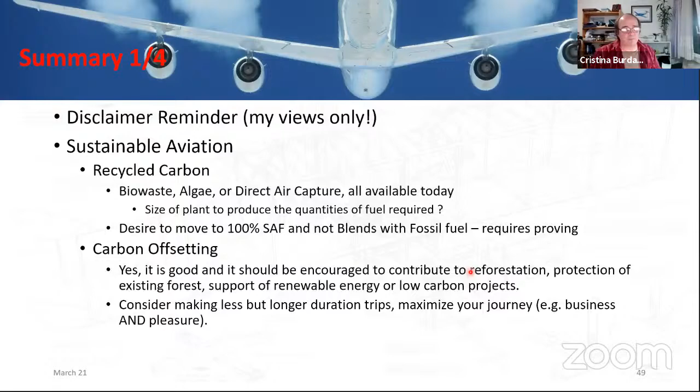Hydrogen, we looked at hydrogen. The problem with hydrogen is the nitrous oxides. Maybe that could be offset by burning in oxygen instead of air, because you're getting the oxygen from the hydrolysis, and then you're not burning it in air and not getting the nitrous oxide. But then you're going to be carrying more oxygen bottles, and it's all weight issues.

I just don't see it working. I don't know how they're going to solve the nitrous oxide issues. Plus hydrogen contrails, about 2.5 times more water. Clouds and global warming, maybe Simon can say something about this a little later. Clouds can trap the heat and warm - this is one thing we all know about, but we also know they can provide cooling to the planet. It's a love-hate relationship with clouds and contrails.

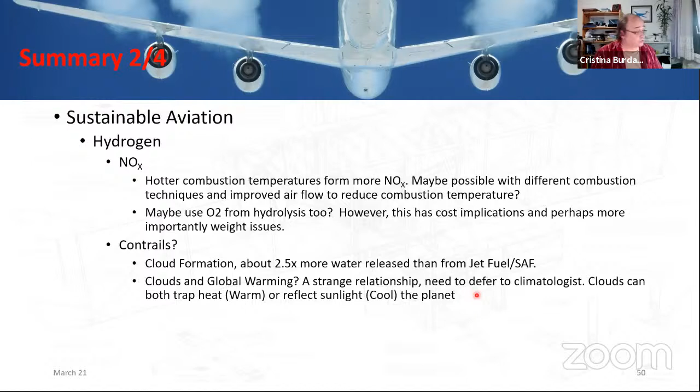But whichever path is pursued, expect costs to fluctuate. When CORSIA comes in, airlines are going to have to offset their carbon, whether they do this by buying sustainable aviation fuel or buying carbon credits on your behalf. Your ticket prices are going to go up. With hydrogen, you would have longer trips or stopovers, but maybe a tactic should be used: liquid hydrogen for shorter trips and sustainable aviation fuel for longer trips.

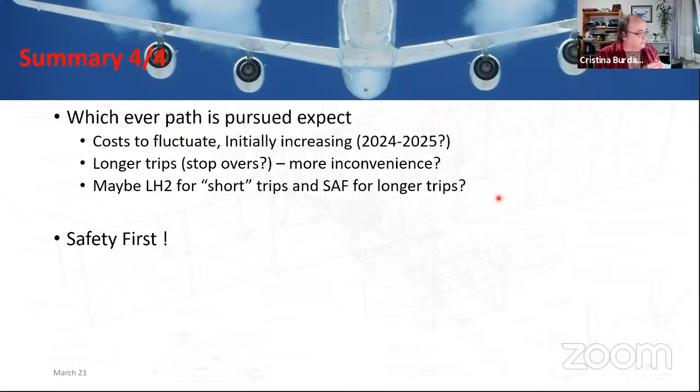But importantly, we can't do this in a rush. We're a safety first industry, and it's not something we can take lightly. So it's not something we can change overnight. No, it doesn't work that way - it's got to be proven. I'm sorry I've taken too much time, Simon.

Thanks, Eddie, that was absolutely fascinating. No problem with the time at all - could have listened on and on to that. I think you've given us a whirlwind tour of aviation and where it's going in the future, and the considerations we all need to have. Certainly lots of interesting points made, and lots to ponder for the future.

If anybody's got any questions, please post them in the chat, either on YouTube or in Zoom. We've got one coming from Ian Sadler saying: what do you make of the claim that the Wright brothers weren't really the first to fly? The launch ramps they used means they were aided, and the first real unaided flight was by Santos Dumont in France. Interested to know what you think of that, particularly given what you said about George Cayley. So what do you think of that, Eddie?

I'd actually have to go back and check on that one. Yeah, it is slightly debatable. The Wright brothers get the popular vote - they're the ones that appear left, right, and centre. That's all I can say on the subject. To tell you the honest truth, I'm sure there are others.